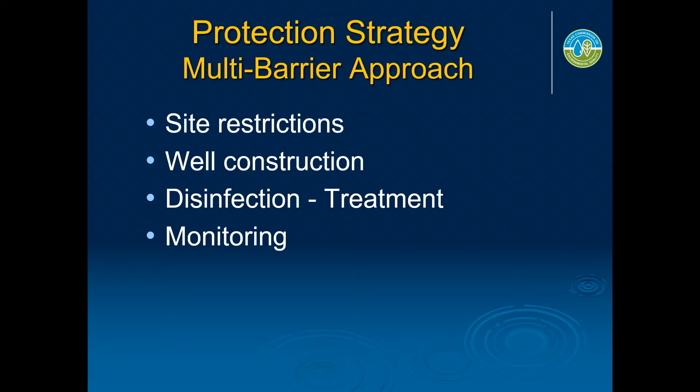We're going to be concentrating on the site and the well construction, but just giving you that framework. The TCEQ rules that apply: 290.41C covers groundwater sources. One thing I'd point out is these books are over there in the area where the technical advisory groups are sitting, and you can go grab one.

If you don't have a copy of the rules, you can look them up on the internet. And then 290.42B covers groundwater treatment, the various kinds of groundwater treatment, particularly iron and manganese removal, those kinds of things.

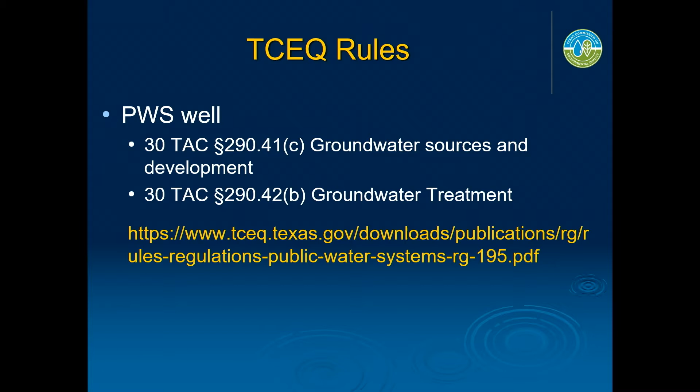Now, there are other rules that might affect water wells. One thing is, if you're going to drill a water well for your public water system, you're going to get a licensed water well driller to come drill that well for you. He's going to be licensed by the Texas Department of Licensing and Regulation. So whether he's drilling a domestic well or a PWS well, he's a licensed well driller. There's certain rules he follows for a domestic well, and additional rules when it comes to doing a PWS well.

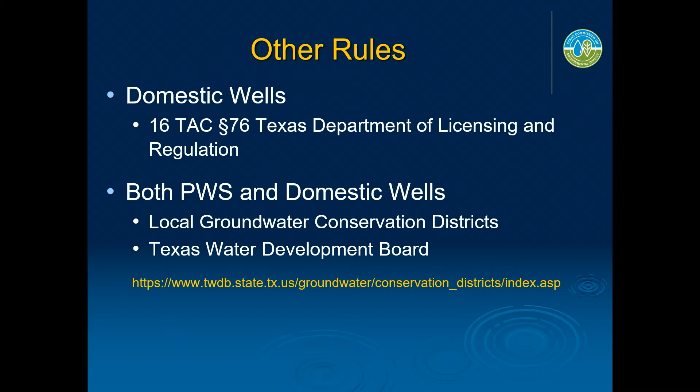Both a domestic well and a PWS well would be subject to local groundwater conservation districts. In Texas, there's about 100 groundwater conservation districts now, maybe more, and they regulate the withdrawal of groundwater in different counties around the state. So you need to be familiar with whether you're in one of those.

You can go to the Texas Water Development Board's webpage, and they have maps that show where the groundwater conservation districts are. Also, the Water Development Board has rules that guide some of the actions of the groundwater conservation districts, and those rules could apply to your well.

So one thing, we just wanted to throw up a slide that contrasts what a PWS well and a domestic well look like, the difference there might be between them. Sometimes people call me wanting to put a business on a piece of property, and they realize they're going to be a public water system, and they complain because they already have a well. Well, your well is probably not according to the designs of a public water supply well. So this kind of shows that picture.

One thing, for your public water supply well, if you've got a 10 3/4 inch outside diameter casing that you're sinking into the ground, then you would need the hole to be 13.75 inches or greater in diameter. We're looking for a 3-inch greater diameter on that hole, or a 1.5-inch greater radius.

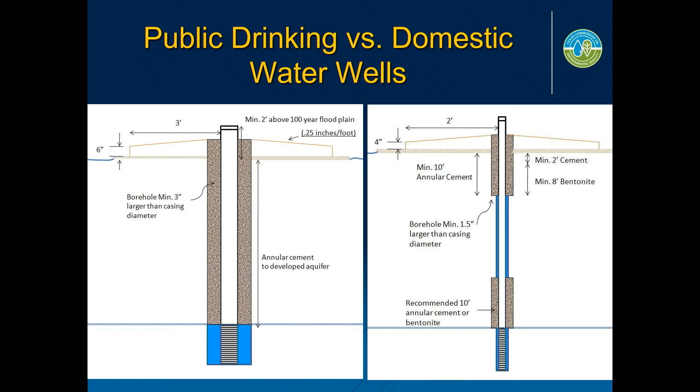Now let's talk a little bit about, if you're developing a well, what do you have to do with regard to the TCEQ? You're going to develop a proposal for your well, which will be the plans and specifications created by an engineer, and he's going to have other pieces of this that he'll bring to the TCEQ. Then the TCEQ can, if we approve it, you can move on with construction of that well. So there's a two-step process - we approve the construction, then you go ahead and proceed with construction.

Then in step two, once you've constructed the well, now you have water samples that you can bring us, you can send us a copy of the sampling so that we can look at what the water quality is. Can we approve that water for consumption by the public, or is there going to have to be additional treatment? So there's a second step, and if we approve that, then you proceed to use the water.

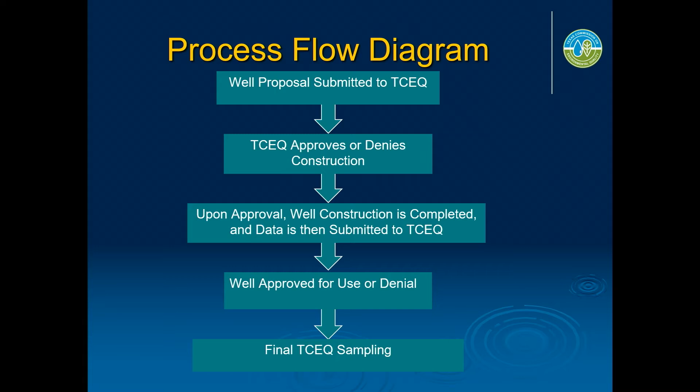There is a final step whereby a TCEQ contractor will come out and take a sample of your well while it's in production, and we'll do a whole lot of water quality testing on that sample. If it confirms that everything's good, then you're in good shape. If that test were to show some problem, then we would have to get to work on what to do about it.

So that first step, step one - what do you bring to the TCEQ? Of course, the engineer will create a cover letter. There's a form that we ask to always be with our submittals that gives us a lot of basic information that some people will forget if it's not there. The engineer will provide an engineering report, a pollution hazard survey. We'll need, if needed, the draft sanitary control easements. There'll be a location map and the plans and specifications for the actual construction of the well.

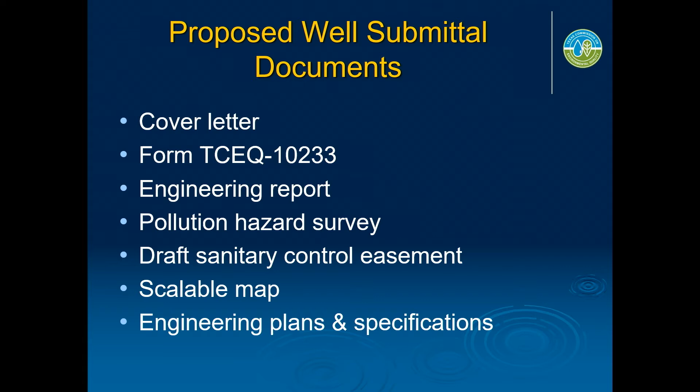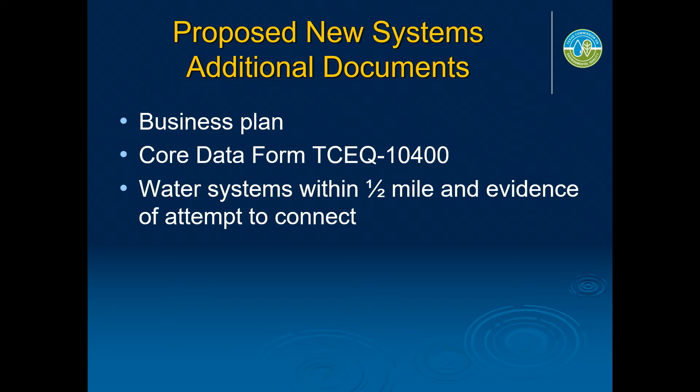Now, if somebody's presenting something for a new public water system - and we get a lot of new public water systems for businesses, RV parks, and all kinds of things like that - we have to have a business plan to show us that you have the financial wherewithal to maintain a public water system. There's a core data form that really discusses the form of business, and you also have to show us that you've looked into whether you can get water from nearby systems. So that's what we ask for new systems.

Now, the engineering report would look for a map that shows the area to be served and a discussion of what kind of facility we're creating, how many connections do you have, and what population you're expecting to serve. That goes into what capacity is required for the facility. And especially if it's a new facility, you'd need to talk about the rest of the system - your storage tanks, your pressure tanks, your service pumps, and disinfection. So all of this could be covered in the engineering report.

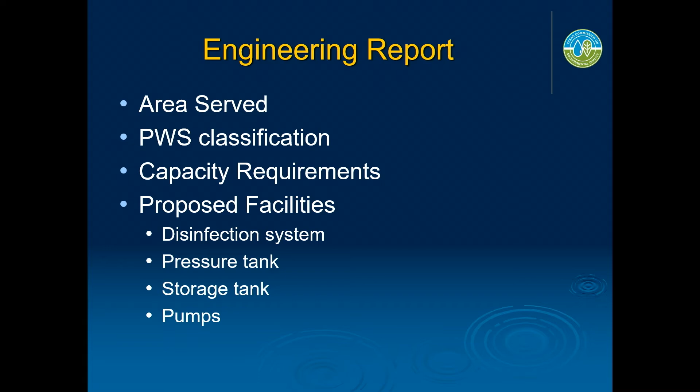The siting of a well is critical - it's important to look at what is around it. So we start looking at pollution hazard surveys. Are there abandoned or inoperative wells nearby, a nearby well that hasn't been capped or something? It could be a pathway for pollution down to the aquifer.

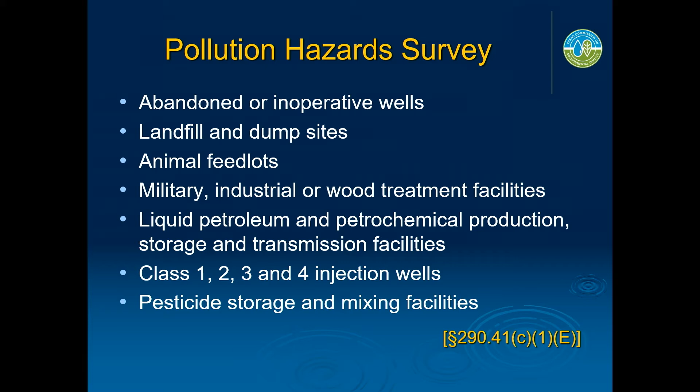Now we look very closely at what's within 150 feet of the well. Within 50 feet, you can't have livestock in pasture very near the well. You can't locate a septic tank or sanitary sewer, and you can't have a storm sewer that close to the well. Within 150 feet, we don't want a septic tank drain field.

Like if you're building a gas station, you can't have the gas tanks and all of that equipment within 150 feet of the well. And we don't want to see any improperly constructed wells, especially within 150 feet of the proposed well.

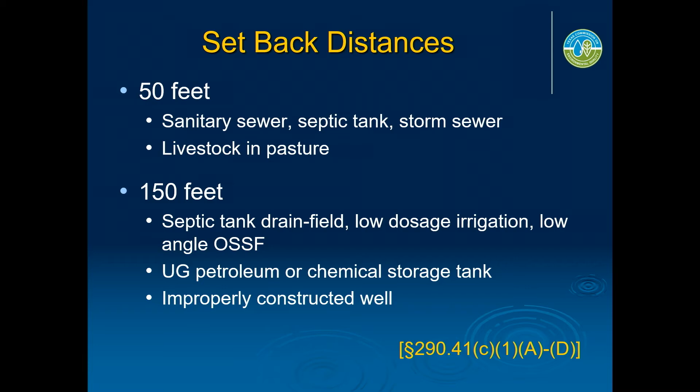Some other things: within 300 feet, we don't want to see a wet well or a lift station, or a drainage ditch carrying effluent from a treatment plant or an industrial waste facility. And within 500 feet, we don't want to see a sewage treatment plant or an animal feedlot.

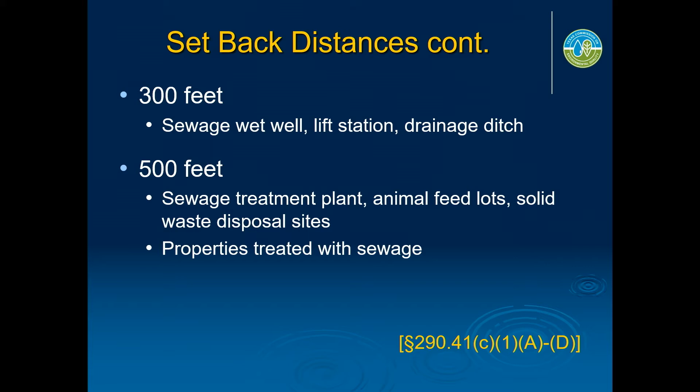This next slide shows these setback distances we're discussing. We don't want to see these things, so we'd like to look at everything within 500 feet, and even out to a quarter mile from your well, to see what's there. Then within 150 feet, we're going to require a sanitary control easement against that area.

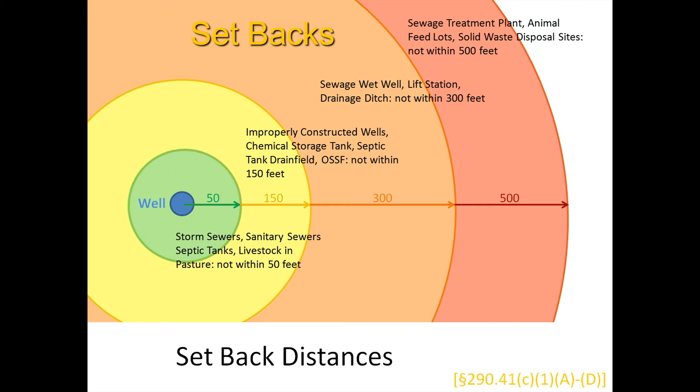So the proposal for the wells should have a good map that cites exactly where the well is. It's very good to have the lat-long on that site.

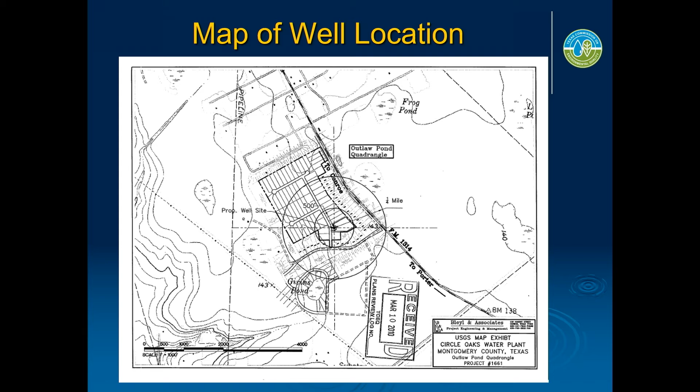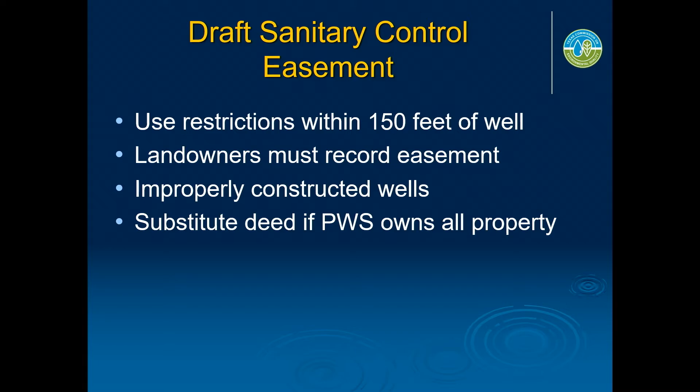Then we were talking about a sanitary control easement. If you own all the property within 150 feet of the well you're proposing, then you have sanitary control. If our inspectors come out and find that you're storing barrels of oil right there on top of the well, we'll get those out of there. But if you don't own and control all of the land around it, then you have to get a sanitary control easement from your neighbor.

That's the procedure. That sanitary control easement states none of these things can be constructed within 150 feet of the well. That easement is then recorded at the courthouse, so it becomes a permanent feature of the property. If that property is sold to someone else, it's still prohibited for anything to be constructed near the water supply well.

We don't require the sanitary control easement when you're constructing the well. We'll require that it be executed before we look at step 2 and then grant you use of the well.

So when it comes to the actual construction of the well, we want you to be careful about some of the methodologies you're using. Be careful that during the construction process you're trying to minimize contamination. What you're doing is drilling down to that aquifer.

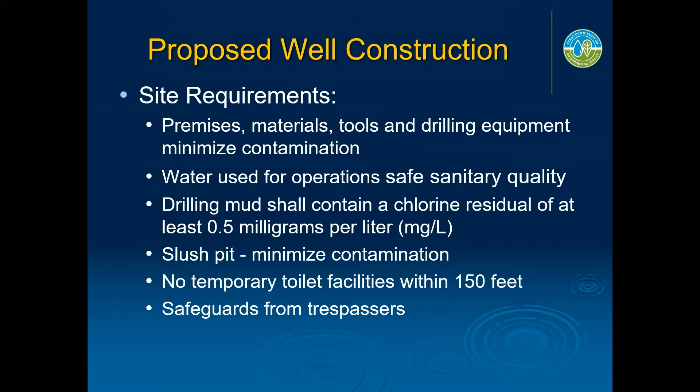Another thing is the materials that you use, the well casing itself. Any public water supply well has to be constructed according to the American Water Works Association A100 standards. That has standards for the casing of the well, what kind of materials you can use, and it needs to be specified according to those rules. Of course, it can't contain more than 0.25% lead.

The specifications also need to detail the cementing of the well, that it's going to be pressure cemented, and all of those details. We'll be looking for all those details as we review the plans and specs.

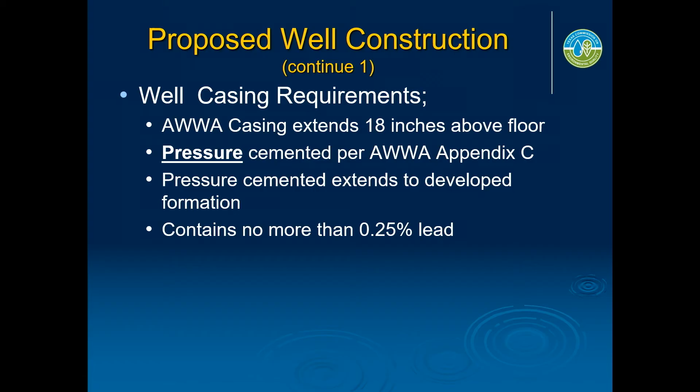Then when you think about the well head, that part you'll see on the surface of the ground, we require that it be 2 feet above the 100-year floodplain elevation, to protect it from flooding. The edge of that slab stretches out 3 feet away from the well casing in all directions, and it also slopes away from the well so we get drainage away from it.

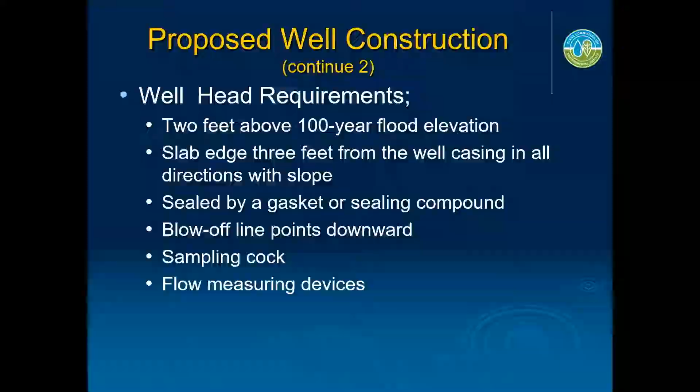The concrete around the well casing is sealed with a gasket or sealing compound. You would want to see the sampling cock where we can get a raw water sample, and there are flow measuring devices. All of these things are incorporated into that wellhead, and some other protections. If you're using a gravel pack well, then that gravel pack is disinfected.

You need an all-weather access road so that you can take care of this thing, an intruder-resistant fence, and one of the final steps is after you've developed the well, you disinfect it for 6 hours, and there's an AWWA standard for how you disinfect a well.

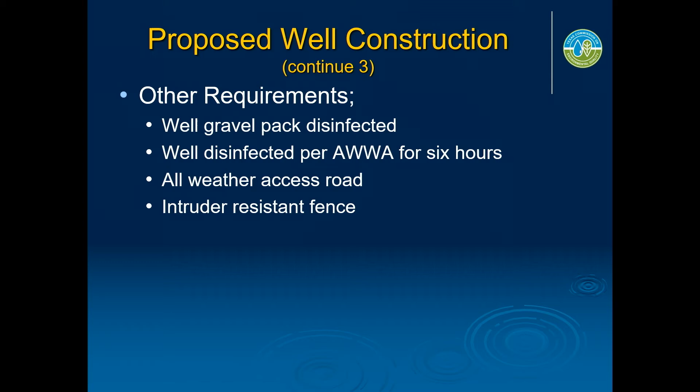As we talk about, any raw water from a well before it goes into the public water system is going to need to be disinfected, and we'll be looking for those facilities for gas chlorine or sodium hypochlorite. And of course, if it's chloramines, then we'll be looking for the addition of ammonia.

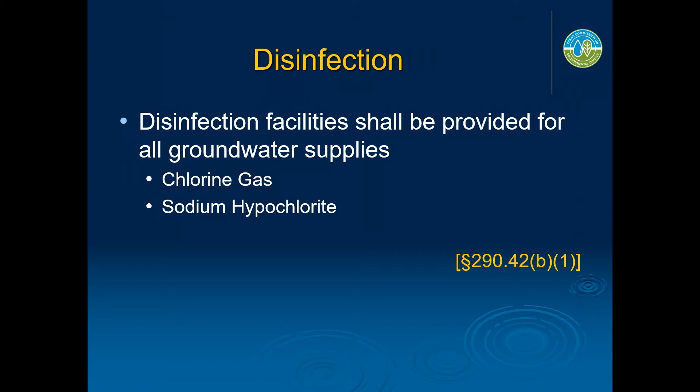Wells could require treatment, and typically out in West Texas we might see high arsenic or nitrates, so you'd have to have your treatment approved to remove that if it's elevated above the MCL. Often you've got iron and manganese problems, and sometimes you can sequester the iron and manganese and be okay. Other times, if it's above like 1 milligram per liter, you're going to have to treat to remove the iron and manganese.

There's rules we have for, a lot of communities have high total dissolved solids in the water, and so there's rules for treating with reverse osmosis. And at times there's wells that have a problem with bacteriological contamination, and if you've got that, then you may even have to go to 4-log removal or inactivation of viruses.

If you have bacteriological contamination, you know, we have a word for that. We call it groundwater under the direct influence of surface water. You'll hear us use the term GUI, G-U-I.

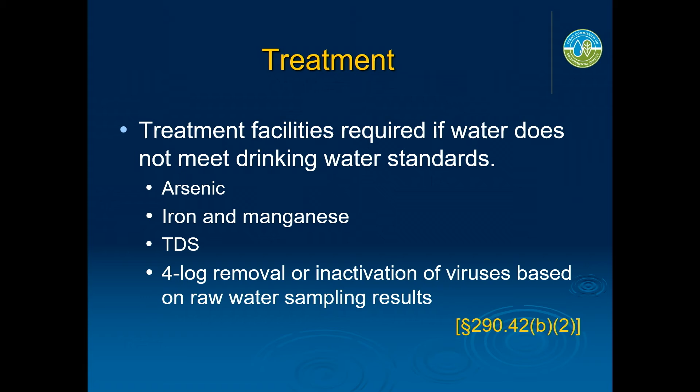This is a diagram that illustrates if you put your well near a water body, you may create a situation where you're actually drawing water out of the stream, so you're getting something more like surface water in your well, and that'll show up as bacteriological hits on your raw water samples. That could get you in a place where you're a GUI, and then you've got to treat with what we call 4-log removal or inactivation of viruses.

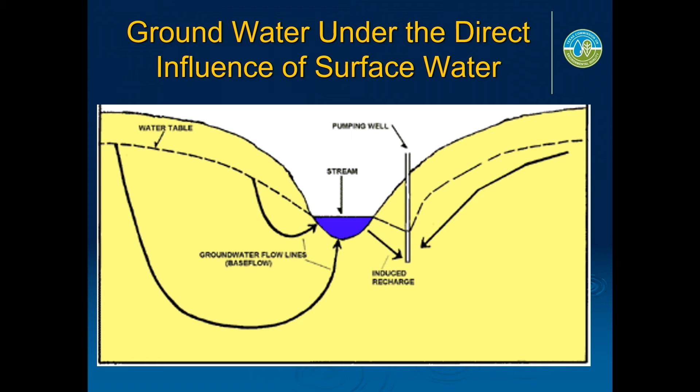So now, all of what I've described are the rules. This is the way we want you to build the water well. And of course, there are times when we can't get that guy to give us a sanitary control easement, or we do have this in the water and we've got to treat for this, so sometimes there's an exception required.

We want those exceptions to come before you submit for plan review, because if you need an exception and you bring it to us first, we're going to say we're going to disapprove it and send you to the technical review and oversight team for an exception.

So the best thing to do is be aware of the rules, figure out where am I going to have a problem, figure out whether you can solve that problem. If you can't, then proceed over to get an exception first. That would be the best thing as far as time.

And so you submit the project, that detail. We need an exception for sanitary control easement because the neighboring property will not allow us, will not give us that sanitary control easement. TROT will look at it if they think they can figure a way.

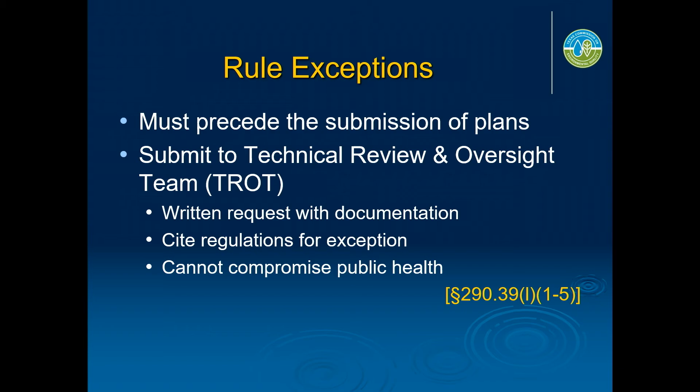If they approve it, then you can proceed and bring the plans to us, and then the plan review team will review the whole thing and approve it. And then you can go ahead and construct your water well.

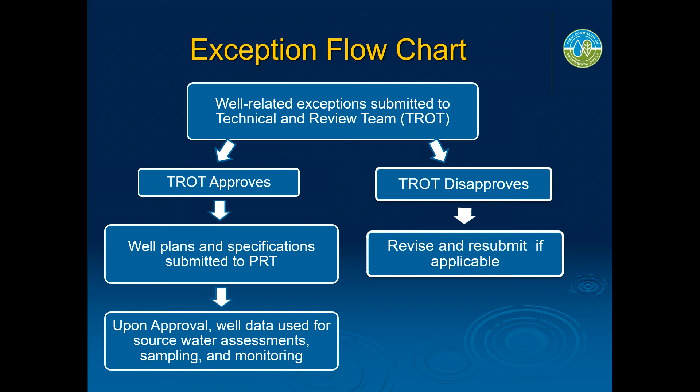Some common exceptions that we do see: for instance, the neighbor has a well that's uncapped and it's not drilled to public water system standards, and it's sitting 125 feet from the well. So we request an exception to the rule about setbacks, and then they would probably require some water quality testing, some bacteriological testing to be done. Like we said, sanitary control easements is a common exception.

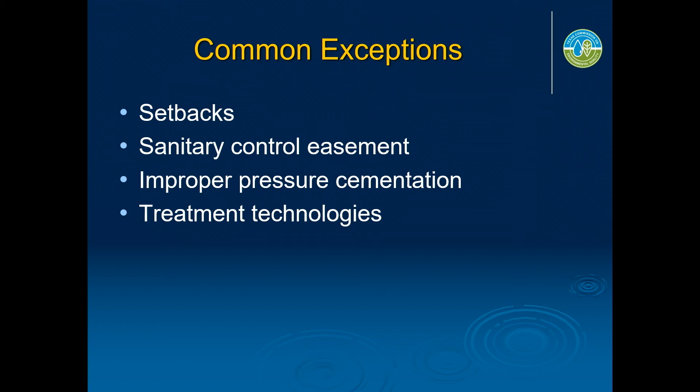Sometimes things happen during construction that require an exception. The cementing didn't go well. Here around Austin, where the Edwards Aquifer is, sometimes the ground has caves, and when you go to cementing the well, you're trying to fill a cave, and so in those cases there might have to be an exception for the cementing of the well.

So some of the things that the exceptions group might require: for instance, if there was a petroleum tank, say you're developing a gas station and some of the stuff is going to be close to your well, then we might require a steel casing rather than a PVC casing. We might also require increased water sampling.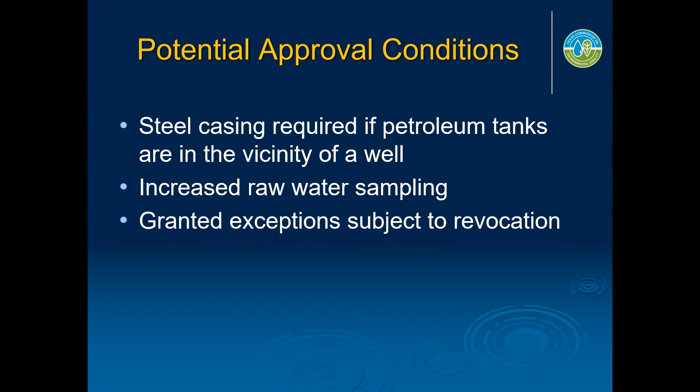One thing about exceptions: they are subject to being revoked if we see a problem, or if we start realizing that we've been granting this exception and we've been seeing this problem, they could be changed or revoked.

So you get your TCEQ approval letter for your well, and you construct your water well according to the plans and specs. 48 hours before cementing the well, you should notify the TCEQ that we're about to cement this well, and so occasionally our folks may come out and want to watch the cementing of the well.

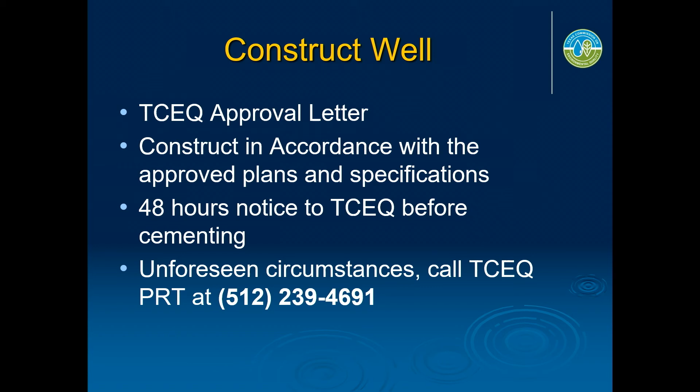And of course, you can always contact us if you run into a situation where, well, we were going to put it here, but now we realize we're going to have to move it over or whatever. You can call us and talk to us if you've got problems like that.

Okay, so you've constructed your water well, everything's gone great, and now you've got water quality samples, and you're ready to send in step 2. This is kind of a description of the package that the engineer would send in: the State of Texas well report. The well driller is required to turn in these well reports, and they have a good bit of information on the well, and it's good for that to come into us.

If there was a sanitary control easement that needed to be executed, we need to have that executed and show that it was recorded at the courthouse. Give us the lat and long of the well location. A 36-hour pump test—we want to see that the well is able to pump and what it's able to do over a period of time.

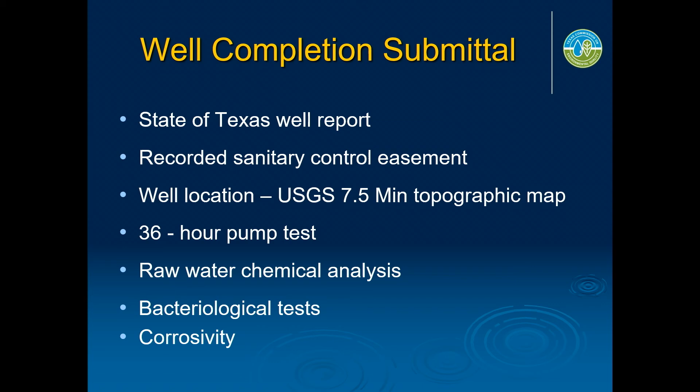And then you have your chemical analysis, bacteriological tests. We want 3 consecutive days of bacteria tests to show that we really have a clean well. And then we'll also look at corrosivity as we look at a well for approval.

I imagine many of you have seen us doing this in the last few years. We want to see that water quality that we can look at with indices to see whether the water is corrosive or not. And if it is corrosive, we might require you to go ahead and treat it before we would approve it.

The final steps are you receive plan approval, and then you need to contact the TCEQ and arrange for the official samples—this is in your approval letter. You're supposed to contact us, and we send out a contractor who takes a water sample, and this becomes more the official water sample. An independent lab takes a look, and then if everything's good, you're good to go.

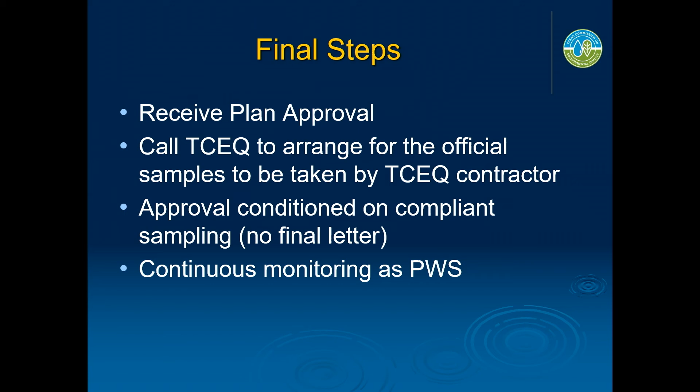We're quite glad to talk about any questions you have regarding the project that you're trying to do as you're in it.

I would also encourage you to get familiar with our web page. The plan review team, you can go to our web page and type in plan review team, and you'll come to some of these checklists that we use. I think you'll find it useful in familiarizing yourself with what you need to submit to us.

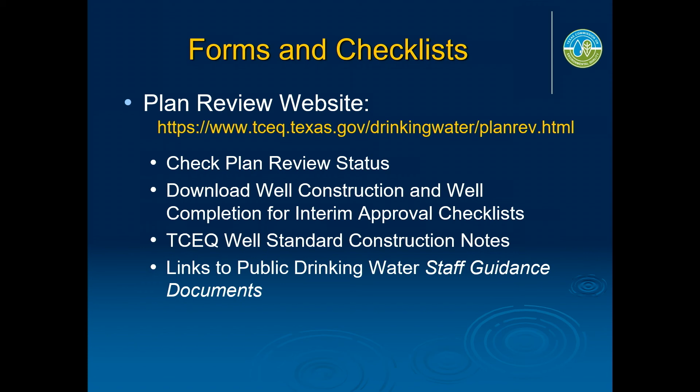So, do we have any questions? Typically if it's more than 100 gallons a minute, you can ask and we can consider, especially at this time. I would say send us an email and ask about it, because in this drought we understand. What we look for is that the drawdown curve begins to go flat, and if in 4 hours it's not pulling down much at all, then we can probably go with that.

If we're going to have a long question, come on up to the mic. But he was asking about whether it had to be a 36-hour pump test, and I was saying that we could work with them during this drought.

I guess the reason I'm repeating that is there are people listening by Zoom.

Yes, sir. I'm really not an expert on groundwater. I think they would have control, or jurisdiction, but I would think most of them would listen very closely to a public system's needs. I don't know whether there'd be people at the Water Development Board that could guide you. Of course, the Water Development Board is both concerned with having enough water for everybody and guiding those districts to the desired future condition of those groundwater conservation districts. So they have both sides of that coin that they're looking out for. They may have some rules or some guidance for you. So I would talk to the groundwater people at the Water Development Board.